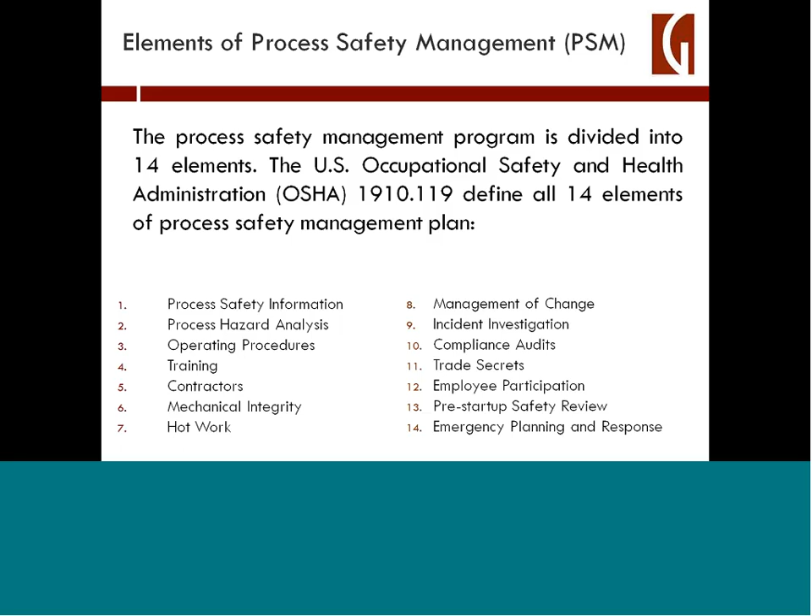Basically, I give you a pictorial of how these elements are again repeated by name, but again, the purpose of the program is to protect employees from the hazards of hazardous chemical releases and exposures in the workplace, and to minimize the likelihood that such releases would occur during the course of a facility's operations.

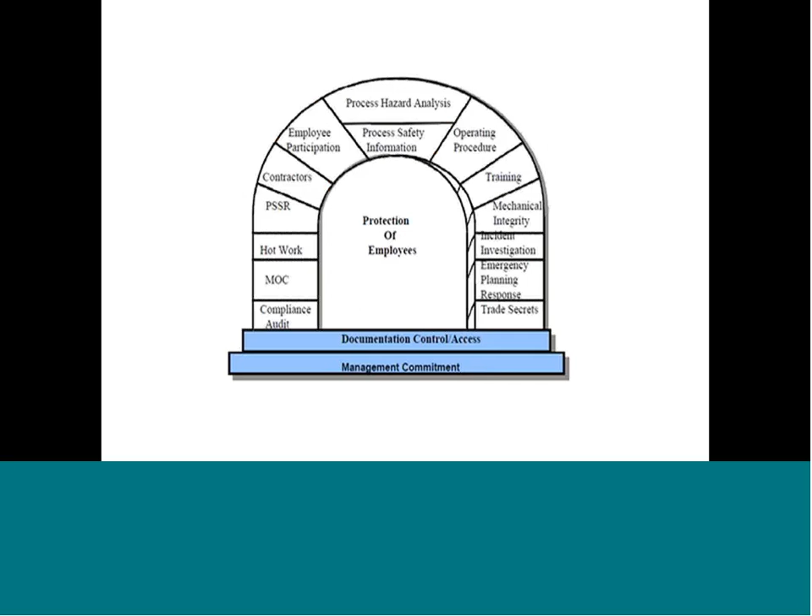The elements mentioned are truly interlinked, and you would find that if OSHA or EPA ever investigate your facility for PSM compliance, they will not only be looking at management of change, but other key aspects of compliance named as all those other elements. So it is a rather comprehensive and somewhat difficult standard to comply with.

The major objective of process safety management, if you do not already know, is to regulate the hazardous chemicals so as to prevent unwanted releases in the workplace. It truly is a systematic approach that a facility must follow as it goes through its attempts to comply with process safety management.

And I list some of the major focus points dealing with design and process technology, process changes once a system is in place, operational and maintenance activities and procedures, non-routine activities and procedures, emergency preparedness and training programs for employees and operators, all of which have to come into play and be integrated in order to have an effective process safety management program.

Now, my experience at this level has been to— excuse me, my screen has frozen.

My experience has been in the ammonia field, anhydrous ammonia field, dealing not only with cold storage, but ambient air manufacturing controls for temperatures, and also the application of ammonia to food processing systems inside manufacturing facilities.

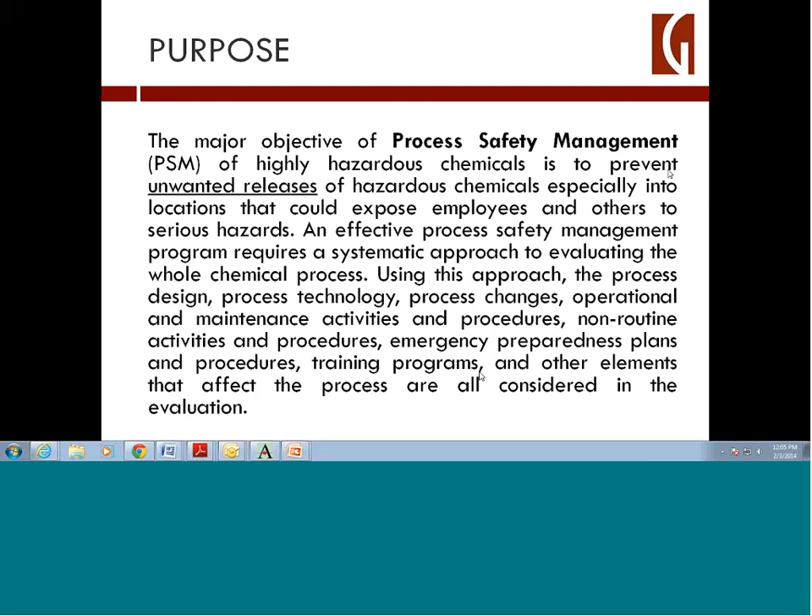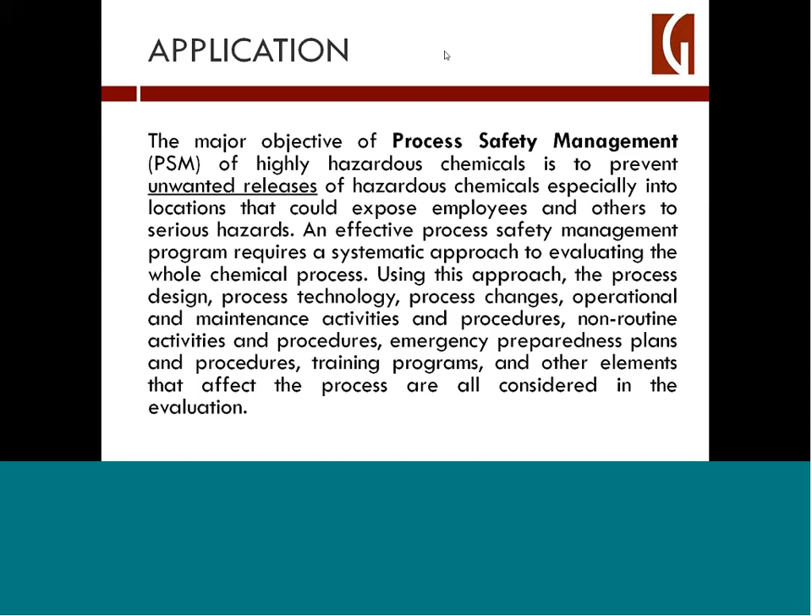Okay, the application lines of defense that have been incorporated into design and operation of the process to prevent and mitigate releases of hazardous chemicals.

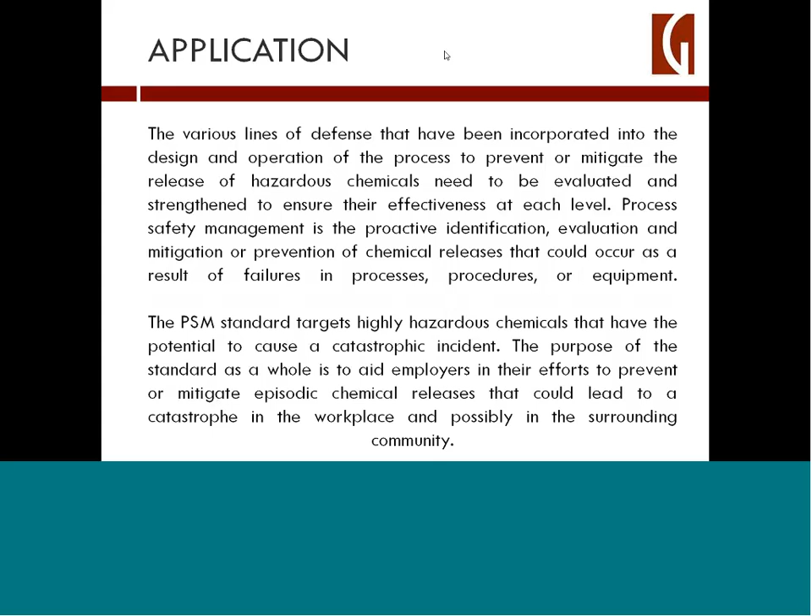The PSM standards are targeted toward hazardous chemicals that really have the potential to create catastrophic releases and events resulting in serious injury and death to employees.

And you have not only the OSHA process safety management regulations that a facility must be concerned with, but also separate mirror image regulations to some extent imposed by the EPA called risk management.

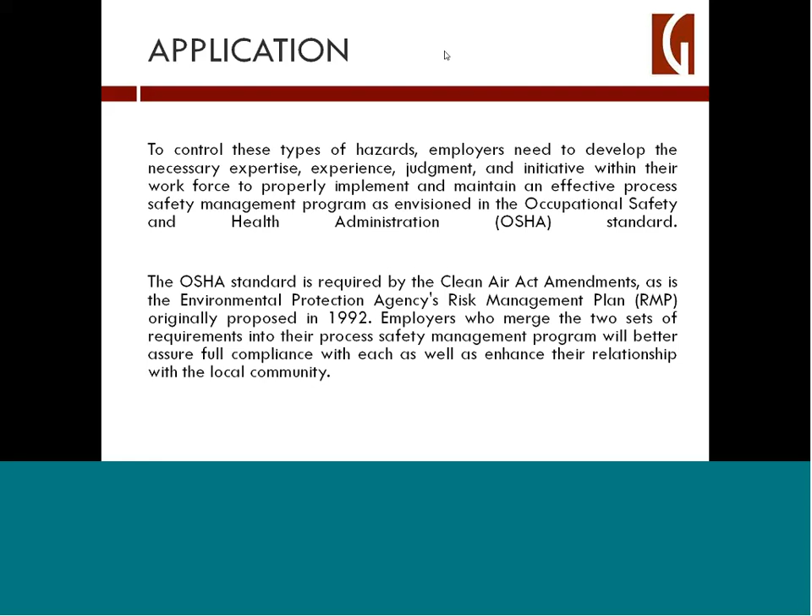And employers who are deemed in violation of OSHA PSM standards will likely also be in violation of EPA risk management plan regulations and subject to dual fines and penalties for such violations. So the magnitude of a non-compliant act by a facility can be, in essence, doubled, and with EPA, fines and penalties can far exceed that which OSHA may apply in the event of a non-compliant regulatory situation.

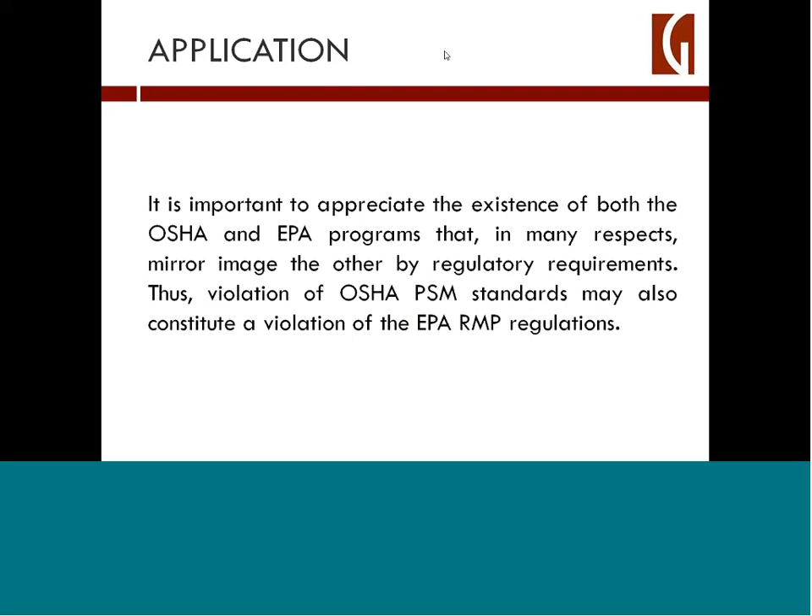Therefore, it's important to recognize the existence of both the OSHA and EPA programs that in many respects mirror each other. There are differences with the EPA from OSHA, but likely if you're violating an OSHA PSM standard, you're probably violating an EPA standard as well.

The hazards of the chemicals used in the process is an important aspect as one of the elements, and I won't dig deep into all of these other aspects outside of management of change, but you need to be generally aware of those other elements in addition to management of change.

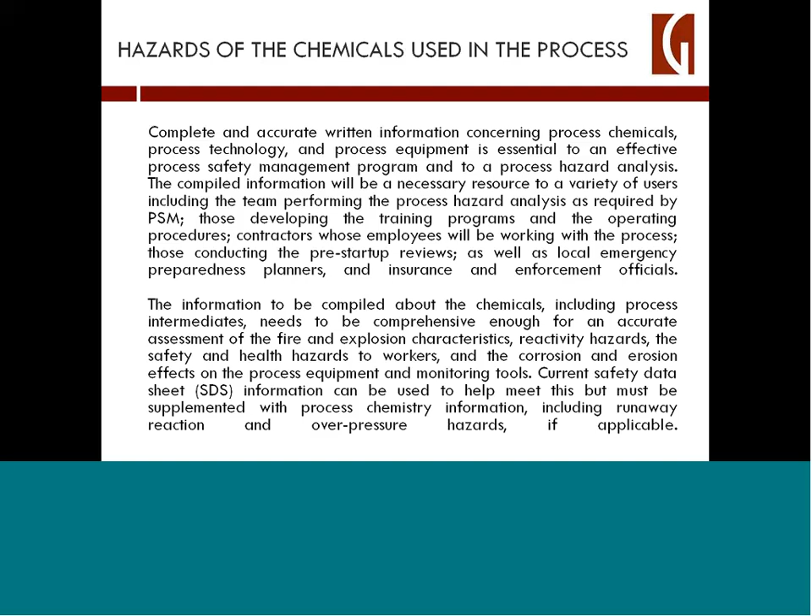You have to have on-site in writing, as well as training of the hazards of the chemicals used in your manufacturing process. The safety data sheet is one aspect of how a facility will help meet those requirements for information and knowledge about the hazardous chemicals employees must know about. But it is supplemented with a whole bunch of other process chemistry information, including runaway reaction and overpressure hazards that should be occurring.

You also have the technology of the process that has to be written up and understood, dealing with safety information, limits beyond which you're prohibited from operating equipment, and consequences of the results of deviating from the operating parameters of your system.

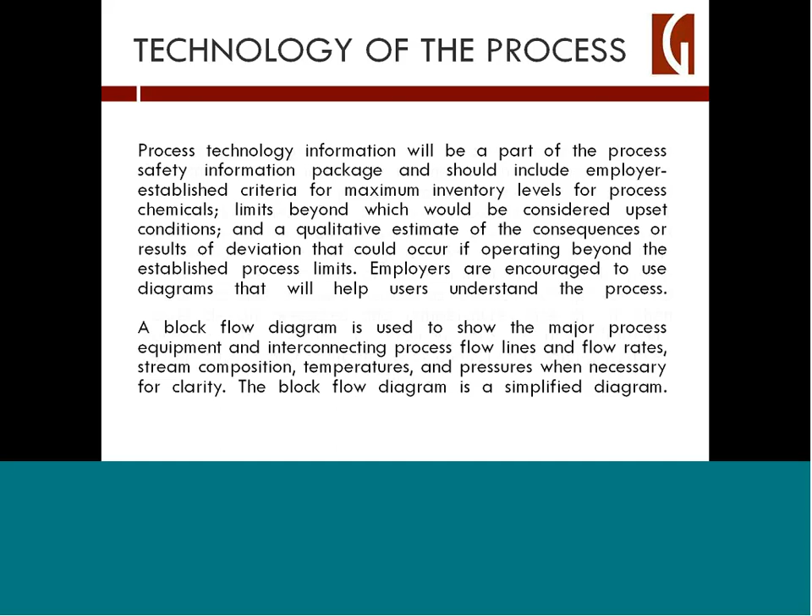And of course, the government really requires diagrams to help people who operate the system understand the process. You will oftentimes find that you need a block flow diagram to show the major process equipment and interconnecting process flows. Process flow diagrams really are more complex than perhaps what I'm about to show you.

But as you can see, you need to have a general written, can be paper as well as computerized, access to the system in its summary fashion on a flow diagram basis. And if you don't have such a diagram basis set out in your PSM program, you are in violation.

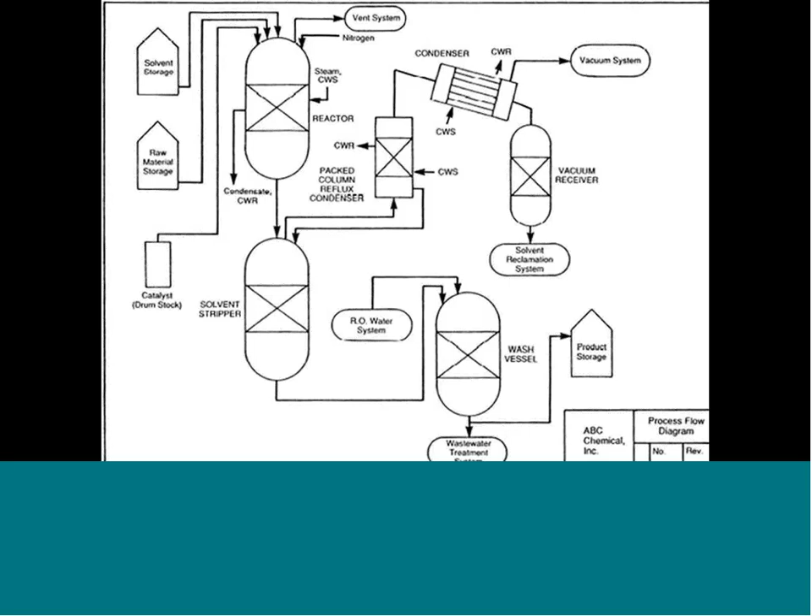Now, the piping and instrument diagrams, which the engineering industry calls P&IDs, are diagrams that show the details as well as information regarding the piping and line design that exists in a facility. This is a much more detailed type of diagramming that has to be done as part of the process safety management program. Without that, you are in violation.

One of the key problems with P&IDs is that as changes are made to systems, the facility has to update those P&IDs. There are computer programs available for facilities to use when they are creating or updating P&IDs. But the updating process is very tedious and requires an engineering-grade draftsman type of expertise to do that. They must be up to date, current, and available for employees to review and use as part of the process safety management system.

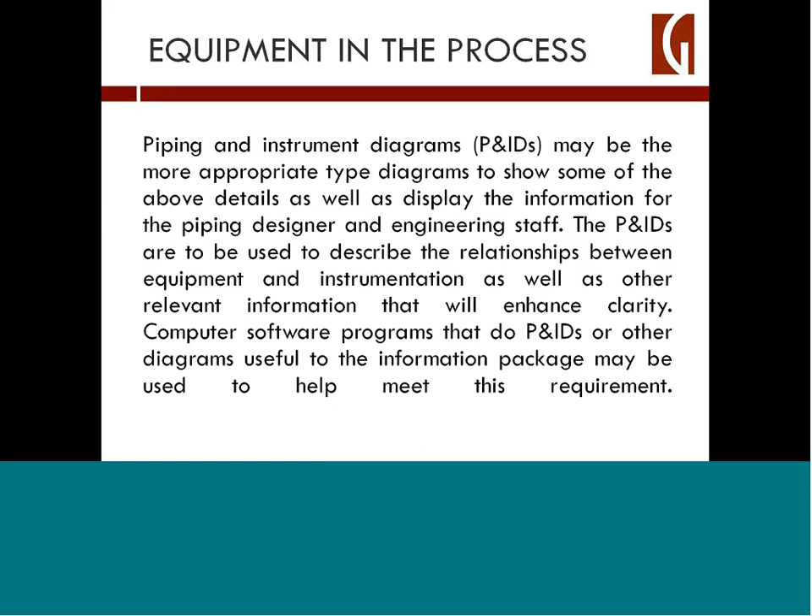The information pertaining to process equipment design must be documented. And what does that mean? Well, codes and standards are relied on to establish good engineering practice. National societies create and publish standards and codes of minimum acceptability that must exist with equipment and systems. It could be ASME, the American Petroleum Institute, the American National Standards Institute (ANSI), the National Fire Protection Association, and other organizations that all provide suggested regulatory code compliance requirements that OSHA and EPA look to as needing to be followed by facilities when designing, installing, and using operating equipment in a closed system that has a hazardous chemical.

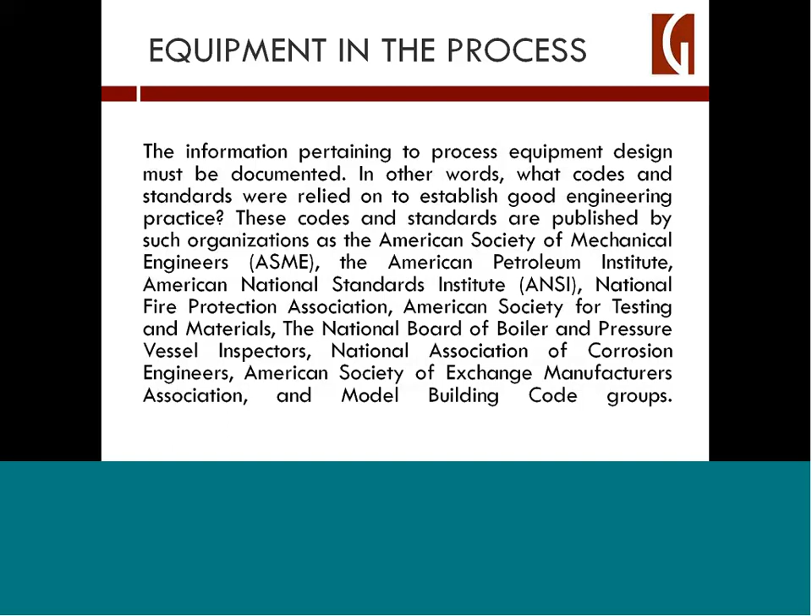For existing equipment design and construction that occurred many years ago, you need to come up with relevant information that you can show OSHA, demonstrating that at the time of the construction and implementation of those older systems, they were in compliance.

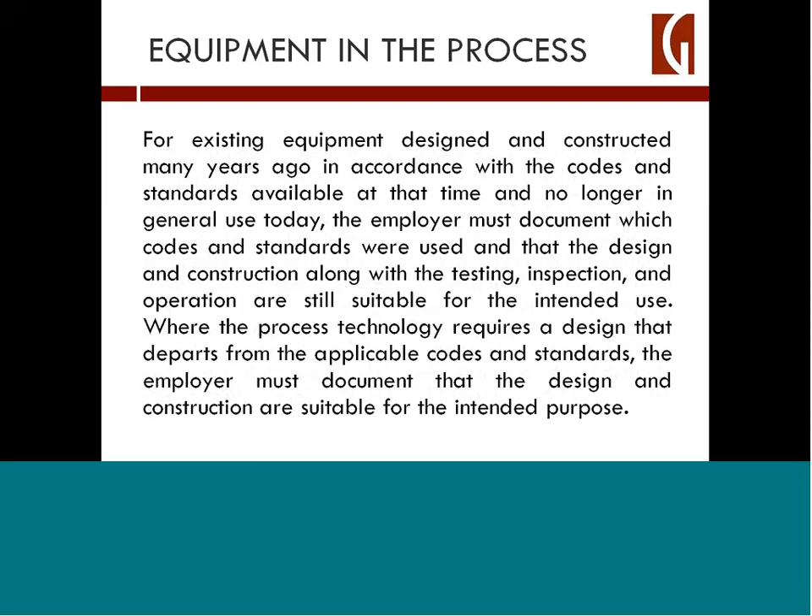The Clean Air Act says that employers are to heavily involve their employees in the process of risk management, as well as comply with OSHA's PSM requirement. It isn't enough to supposedly train employees and educate them. You actually have to receive input from employees who will be working with those systems in order to make sure that your training is adequate.

And at times, based on the level of employee expertise, they could be maintenance people as well as engineers. They need to be involved in the actual management of change process that we will be discussing here shortly.

Employers who don't have verifiable employee participation, which means sign-offs so that you can verify that employees have been involved in the program, are in violation of OSHA PSM standards and EPA law.

One important aspect of the PSM program is the process hazard analysis, an evaluation, one of the most important elements of the process safety management program. It's an organized and systematic effort to identify and analyze the significance of potential hazards associated with processing and handling, and a PHA is supposed to provide information that will assist employers and employees in making decisions for improved safety.

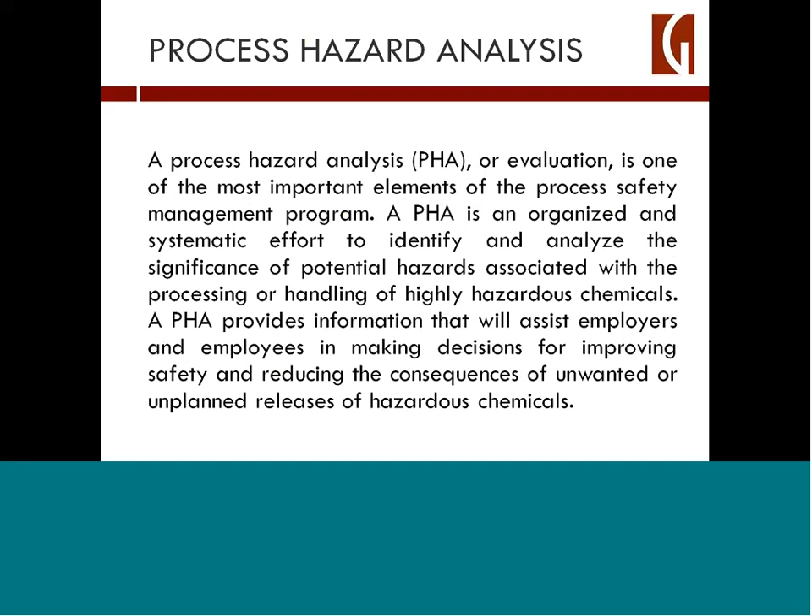What is a PHA? It's an analysis of the potential causes and consequences that can lead to explosions and releases of hazardous chemicals, and it basically focuses on the type of equipment involved, instrumentation, human actions—whether routine or anticipated but not routine—and other external factors.

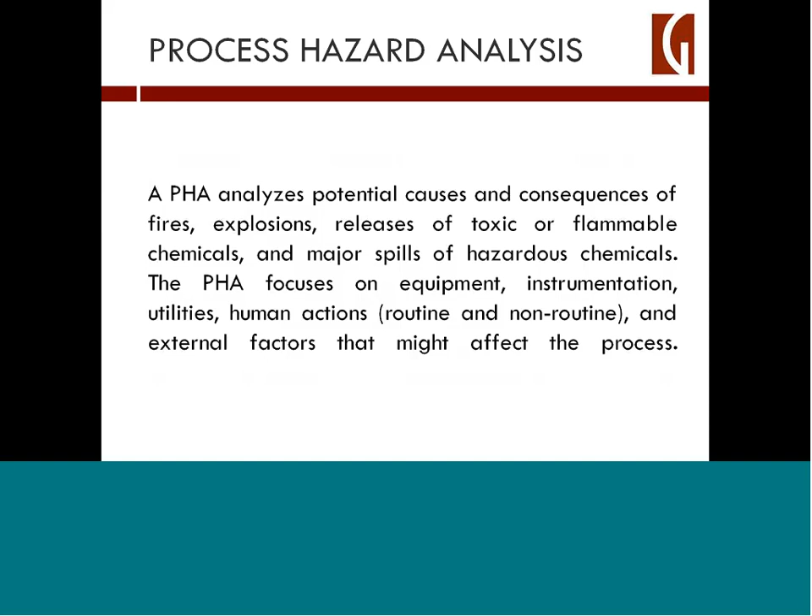Operating procedures are equally important, because if you don't have written operating procedures for the system involved and the equipment, and employees trained on those operating procedures, you are in violation of PSM.

There's a lot of technical compliance verification you have to ensure occurs when you're making up these procedures. They have to be reviewed by competent, knowledgeable personnel within the facility or by outside contractors. This is all done to help make sure that, it's one thing to have a system in place, it's another thing to operate it safely.

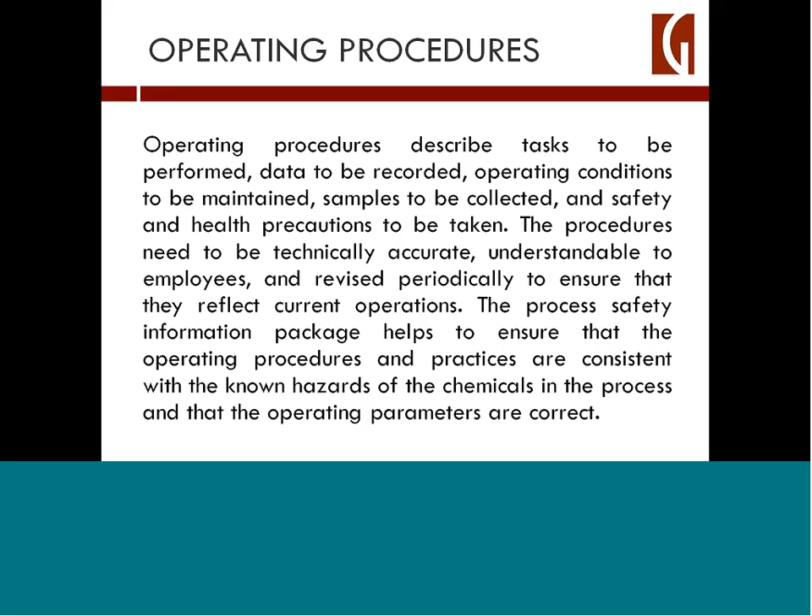So operating procedures that employees are trained on, that are accurate and sufficient, must exist, or else you will be in violation of PSM.

Obviously you're going to have engineering involvement in this process, whether it's outside contractor engineering or in-house engineering. Furthermore, you have to go through and annually certify that the previous year's operating procedures are in fact accurate.

Now, if there are modifications to the system through the management of change process, those operating procedures will have to be changed in writing, and the employees trained on those changes. So part of it is self-executing if in fact you're following the management of change procedures.

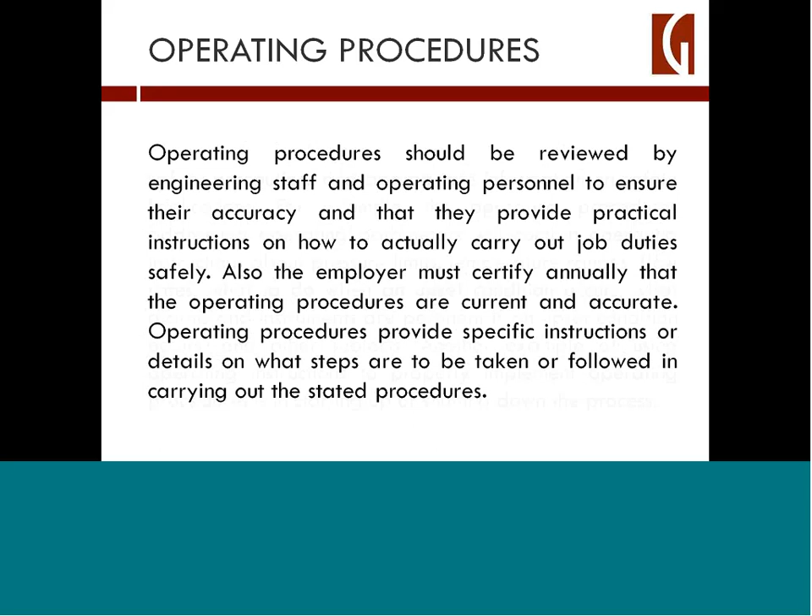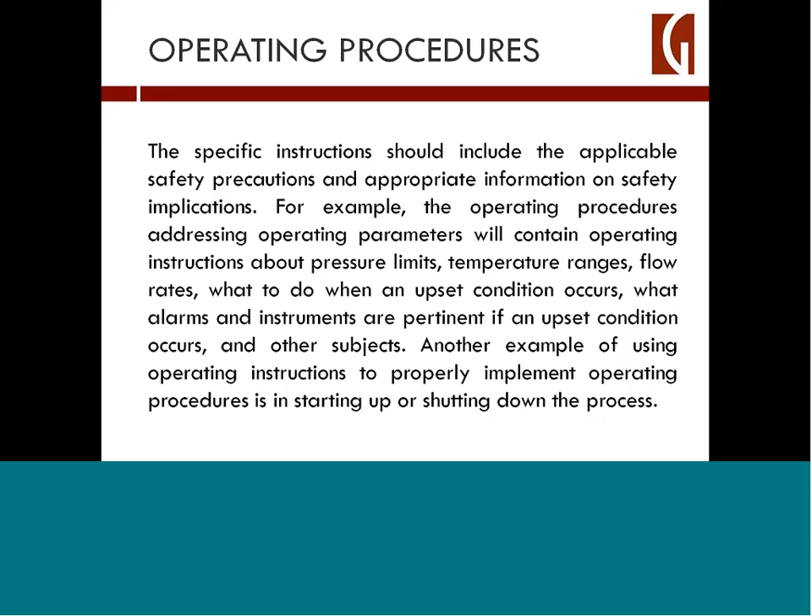Operating procedures have to include applicable safety precautions and appropriate safety information. For instance, procedures addressing operating parameters will contain instructions about pressure limits, temperature ranges, flow rates, what to do when an upset condition occurs, alarms, and so forth that will kick into effect. All of that has to be part of the operating procedures.

I mentioned before the significance of employee training, and that is applicable for both EPA as well as OSHA compliance. You cannot have a hazardous chemical system in operation in a facility without employee training about the chemicals and how to operate the systems for those engaged in that aspect of involvement with a hazardous chemical system.

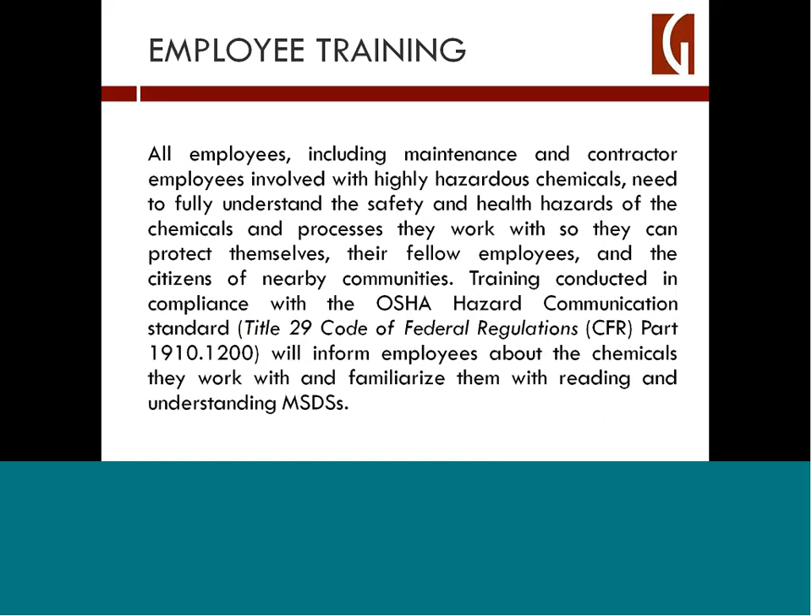It is fairly common for OSHA, when they come in to do an inspection or investigate an incident, to really focus on employee training, because they consider that to be one of the essential compliance regulations facilities have to make sure occurs with their workforce. An ignorant workforce is not something you want when dealing with hazardous chemicals, and OSHA makes employee training one of their higher priorities.

This is especially true, I think, when talking about maintenance employees who are working on the systems when they're down, fixing them, and then bringing them back up—perhaps more so than people who are simply working around the hazardous chemicals but not operating the systems.

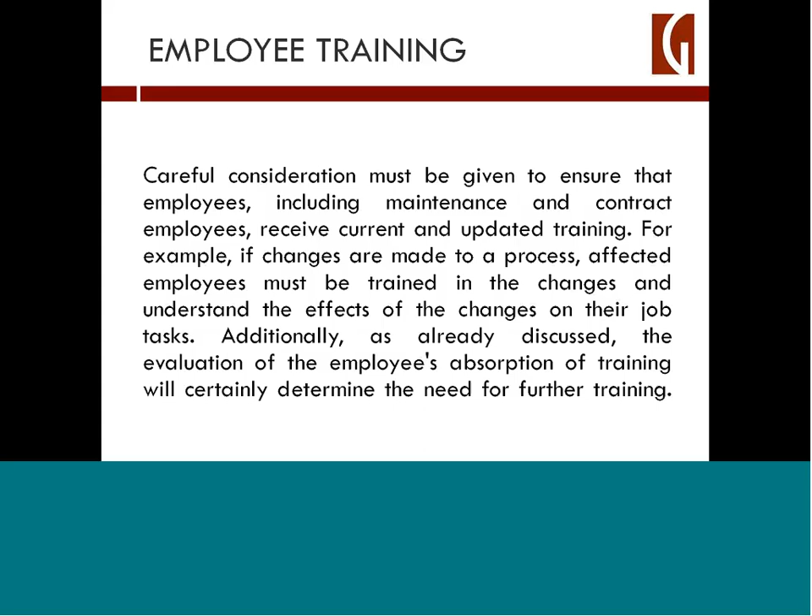You can have a manufacturing process where certain employees never operate the hazardous chemical system, and their training is that when a release occurs, they are to immediately leave the affected area or even the facility itself and let others tend to the issue who are trained in emergency response.

Now, many employers do hire outside contractors to perform work on hazardous chemical systems rather than paying the money to have their own employees qualified to do that type of work. For instance, needing to weld and change piping flows and diagrams, you are not going to have in-house welders available to do that kind of work.

So for contractors whose safety performance on the job is not known, the employer hiring them must obtain information on injury and illness rates and experience when deciding who to hire as a contractor.

I would also add that if you hire outside contractors who are trained and allegedly qualified to work on your hazardous chemical systems, their accidents and injuries in your facility actually have to be tracked by you. They're an independent employer, they have their own people hired, and they keep their own injury and illness logs. But you, as the owner of the facility, having hired the contractor, also have to keep track of accidents and injuries in the workplace, even though you are not the contract employee's employer.

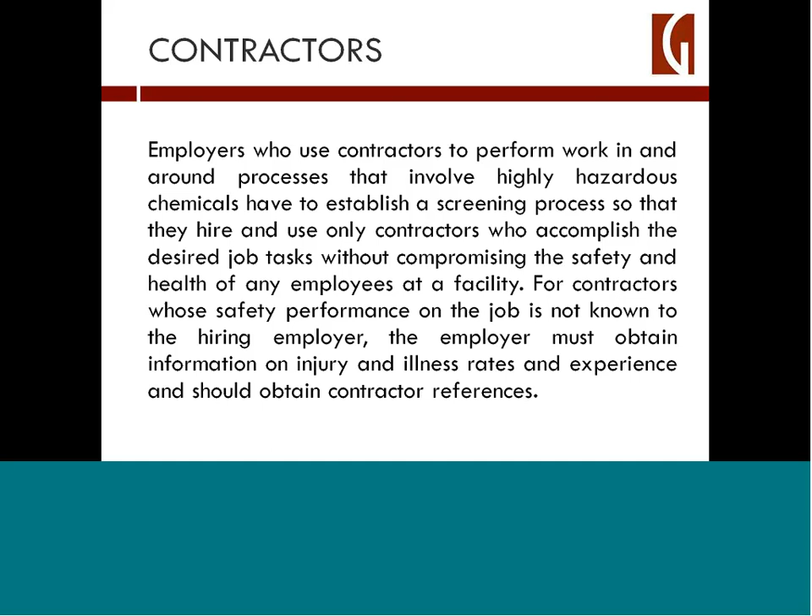That's part of the PSM RMP requirements under the law. And OSHA actually will ask for that type of log information from the owner of the facility concerning contractor employee injuries and accidents.

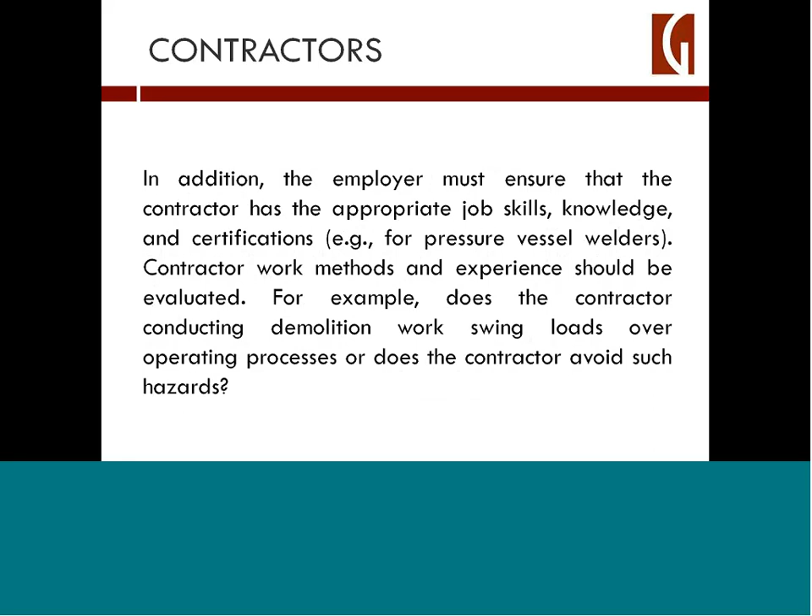One important aspect of hiring an outside contractor is that you have to make sure the contractor is qualified to work on a hazardous chemical system.

You also have what's known as pre-startup safety review, which is for new processes. You have to go through a process hazard analysis and make sure that everything is ready to go before you even attempt to start up a modified system or a new system that involves hazardous chemicals.

And that means completing all P&IDs, completing all operating procedures, training the operating staff on how to run the process, all before startup. You have to have initial startup procedures, pre-startup review, which is going through the process of reviewing everything that's taking place prior to actually transferring a hazardous chemical into whatever system it might be. And that includes operating mode education for the employees who will be operating the system.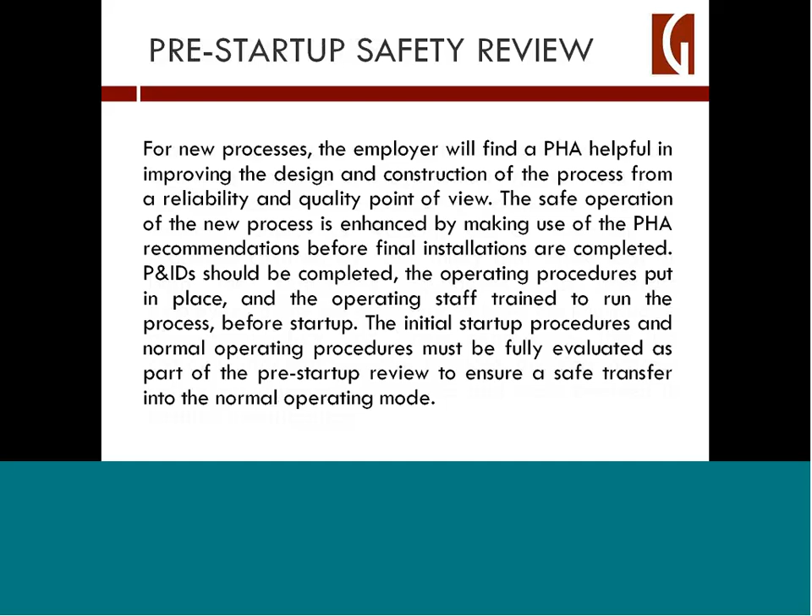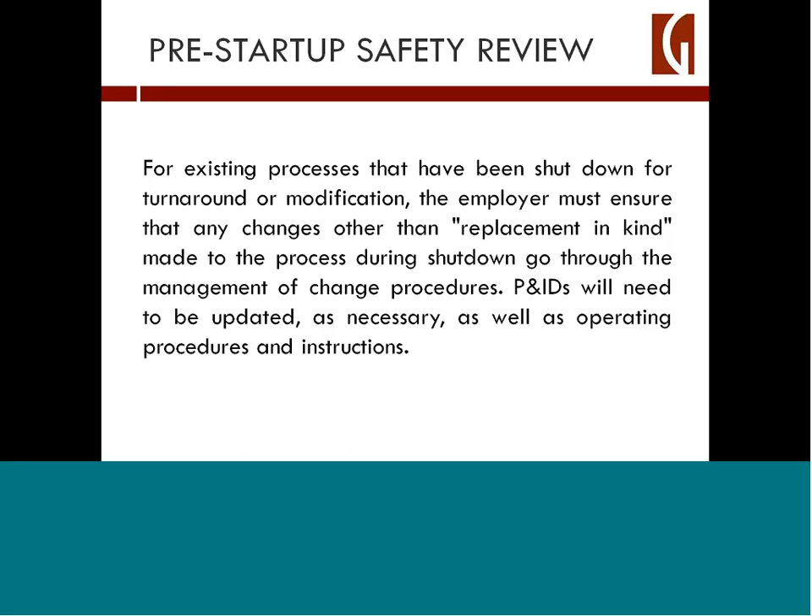Now, when we get into management of change shortly, if you're just replacing an identical piece of equipment like a valve, there's no change in the kind of valve. It's a replacement in kind type of maintenance work performed. You don't have to go through management of change as a process, but you still have to follow other procedures before you start that system back up. Pre-startup safety review, for instance, still has to be followed for that purpose.

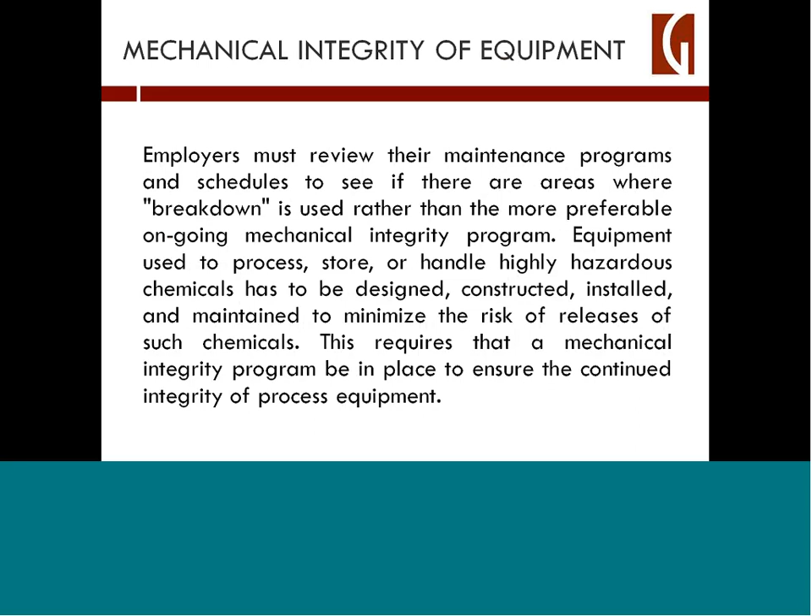Now, mechanical integrity is another important aspect of your program, and you must ensure as an employer that you don't have rusty, malfunctioning valves and lines and systems that through age start to wear down. You have mechanical integrity as an auditing program, one that needs to be adhered to in order to avoid being considered a violation of PSM.

It is expensive at times to have to hire outside contractors to come into your facility to perform a mechanical integrity program audit, but it's something that has to be done. And you will have your maintenance procedures and internal testing procedures and training and personnel as part of that auditing program.

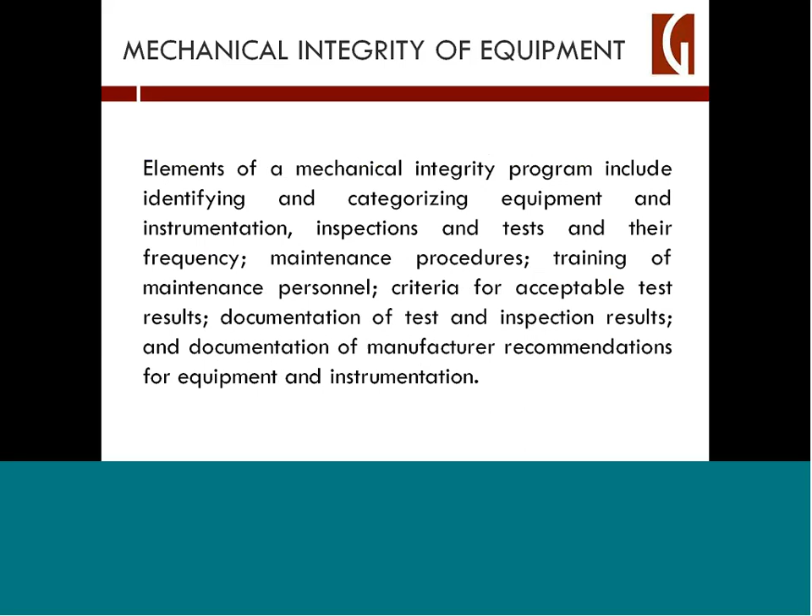Incident investigation is another aspect. If you do have a release in the facility, you have to perform a formal investigation if the release was beyond an incidental release and could have led to a major release or a catastrophic release.

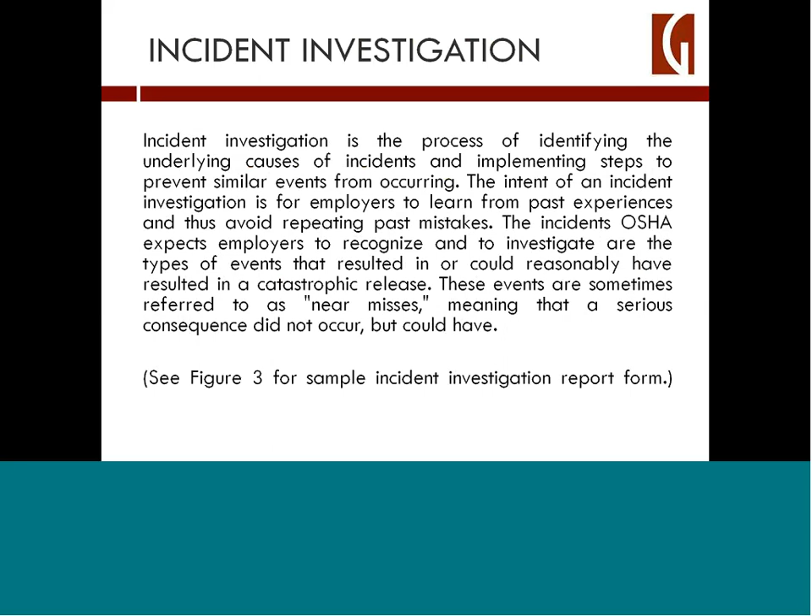And OSHA normally will be in your facility if you have had such a catastrophic release occur, and sometimes the EPA. So you have to develop an in-house system in place as to who will constitute a team of people investigating such releases.

And it must be in writing and made part of the permanent file of the facility, subject to OSHA inspection. You have to be careful as to what's in that report so you avoid as best as possible admissions against your own interests, because the report can be used to cite you if you are mentioning deficiencies uncovered during the course of your internal incident investigation.

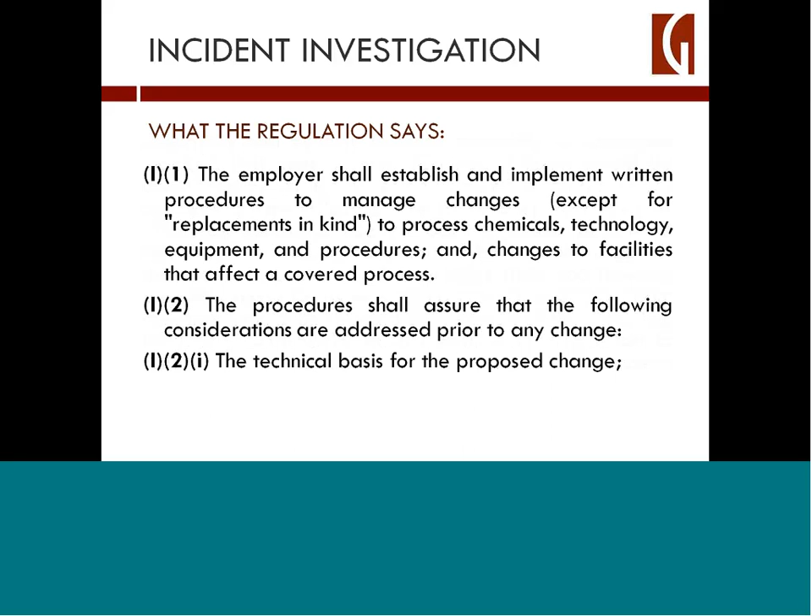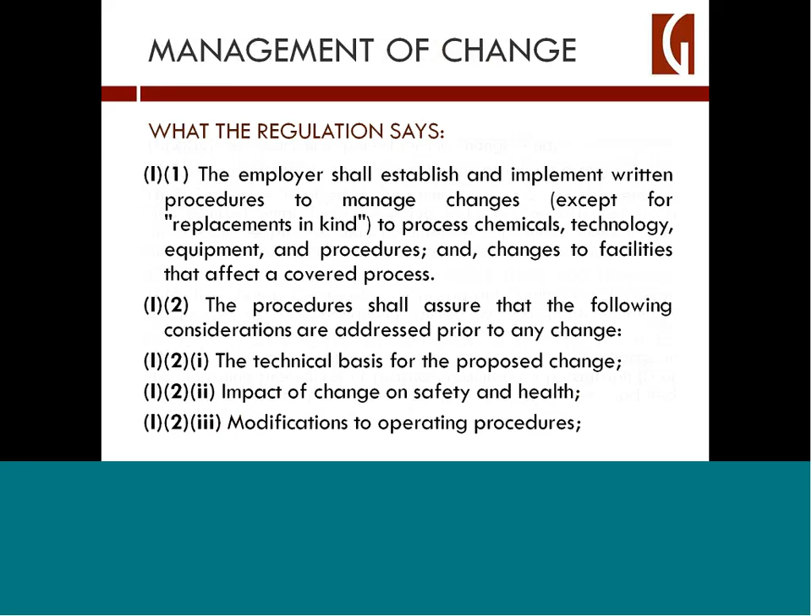Now that we get to management of change, probably one of the most important aspects of PSM, I give you the federal regulations, and I'm not going to go through the regs right now, but basically to properly manage changes to process chemicals, technology, equipment, facilities, you must define what is meant by change.

In the process safety management standards, change includes all modifications to equipment, procedures, raw materials, and processing conditions other than replacement in kind. As a practical matter, if you're going to switch out equipment that isn't identical to the existing equipment, or you're going to change the flow diagram process, or increase or decrease this or that aspect of your system, you have to go through a documented management of change process before you can actually perform the change and start up the modified system.

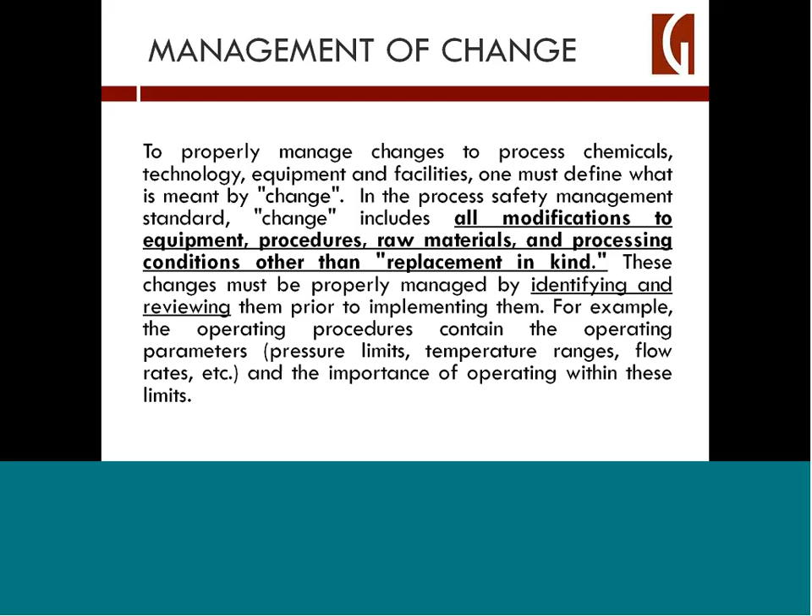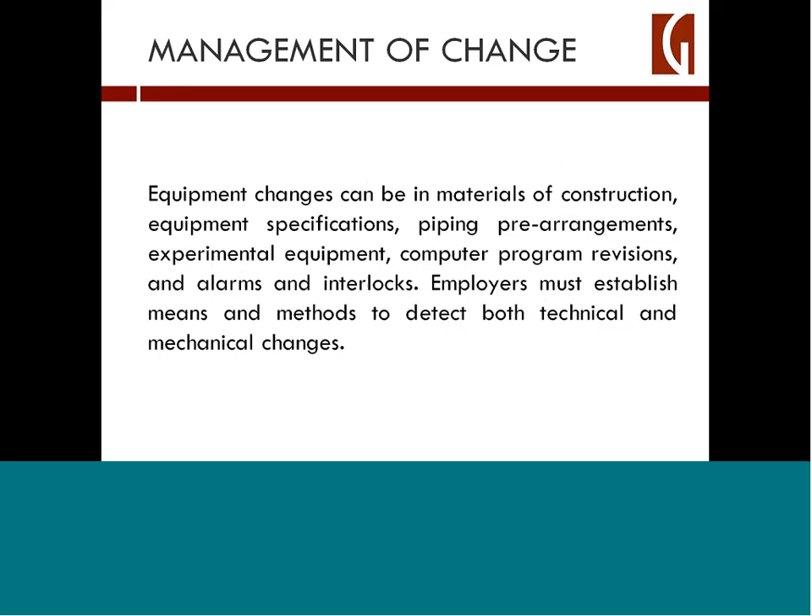It is an aspect that OSHA and EPA look at whenever they audit facilities for PSM or RMP compliance, and you need a file with documentation in it available for the inspectors to look at to prove that you have, in fact, gone through the aspects of management of change.

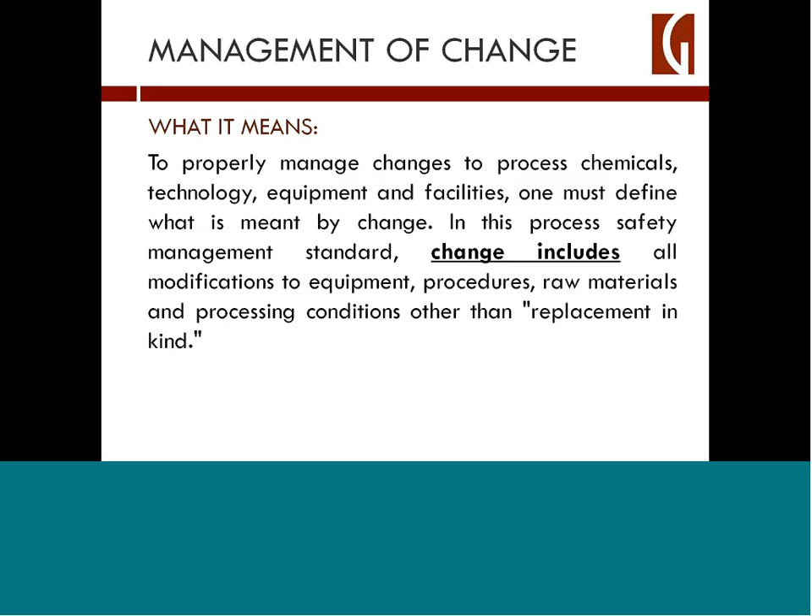What it means to properly manage changes to process chemicals, technology, equipment, and facilities. You must define what is meant by change, and that includes modifications to equipment, procedures, raw materials, and processing conditions, other than replacement in kind.

These changes need to be properly managed, identified, and reviewed prior to implementation. You actually have to go through a process which includes engineering, safety, etc., in writing, that shows all aspects of the consequences of the change have been considered before you even start construction for those changes.

It's going to involve changing operating procedures, which might mean changing pressure limits, temperatures, flow rates. The operator must have flexibility to maintain safe operation within the established parameters, so you need this aspect of management of change in place before the change occurs.

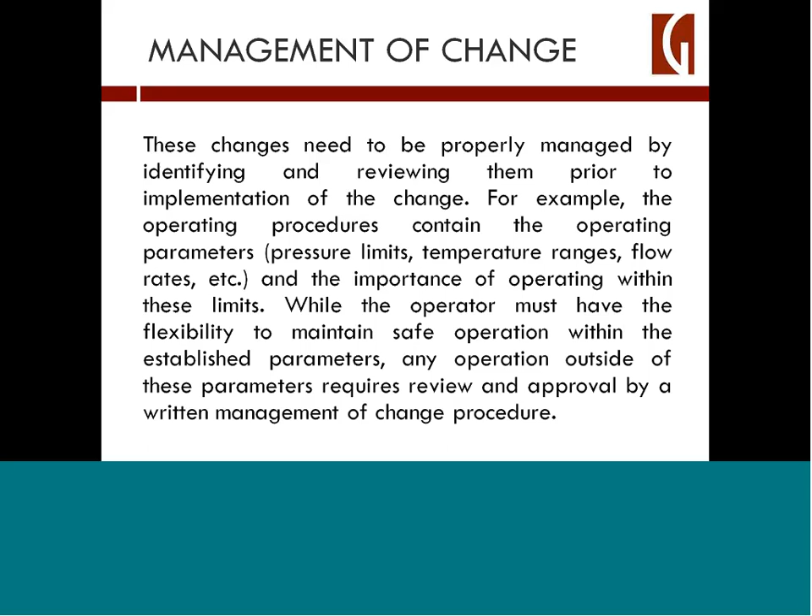Where the impact of the change is minor and well understood, a checklist reviewed by an authorized person, with proper communication with others who are affected, may be sufficient. However, for a more complex or significant design change, the process hazard analysis may have to be performed as well. Changes in P&IDs is usually required, along with operating procedures, mechanical integrity, and electrical classifications. It's a very complicated process management of change is, but must be followed, and lots of times for the larger changes, you do have to do a process hazard analysis.

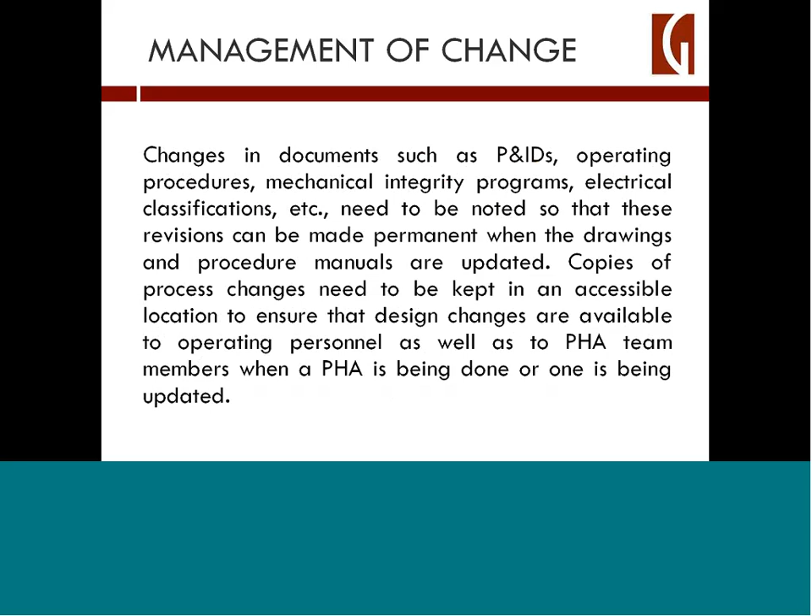Other areas involve emergency preparedness, compliance auditing, staffing to comply with PSM and RMP requirements. When audits are performed of various kinds under PSM, you really need to react to the evaluations when corrective action is suggested. With OSHA and EPA, they want to know that if corrective action was noted in an audit, that action was taken, or that something in place of it was followed to take care of the deficiency or required action.